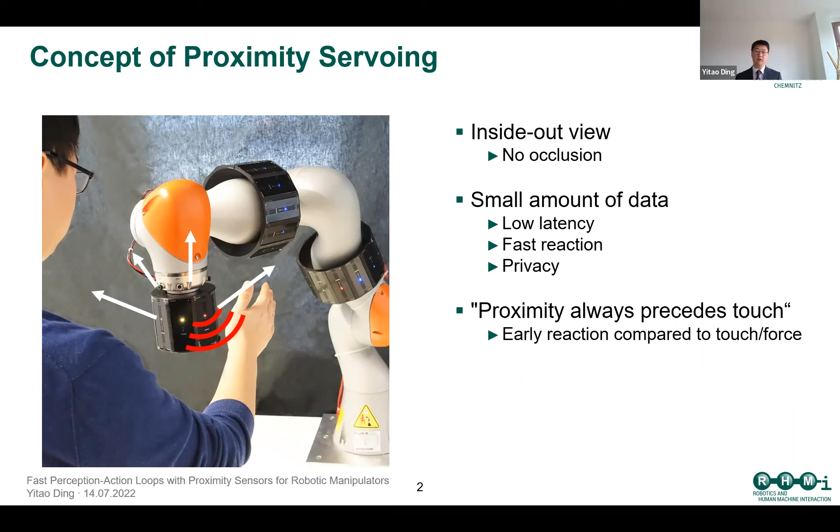I want to start with the concept of proximity perception. Proximity perception uses the inside-out view concept, and compared to external view cameras, they don't experience occlusion in the same way. In fact, anything that occludes the sensor is a relevant obstacle, and otherwise the sensor remains untriggered. With that, we can achieve very low latency and very fast update rates, and this is important for fast reactions of the robot.

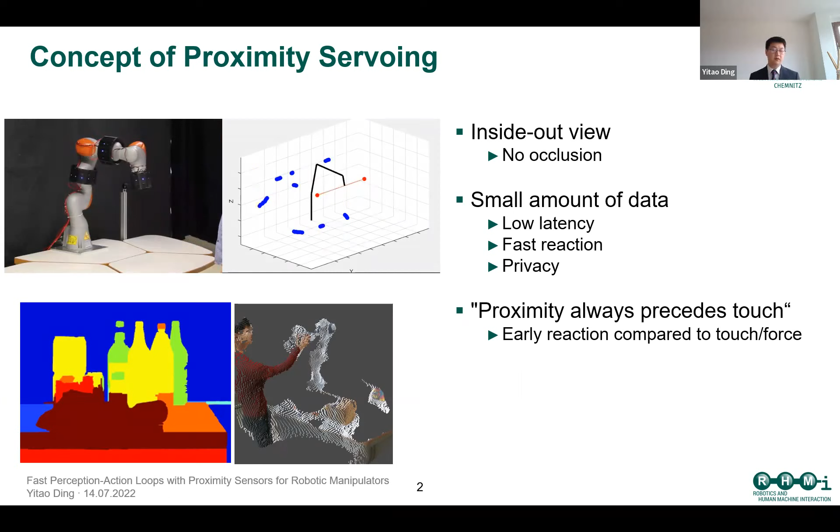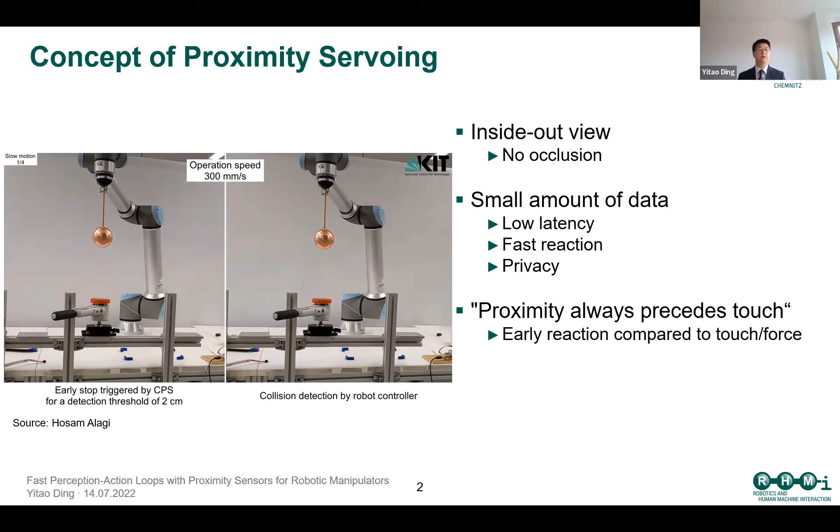Furthermore, we can preserve privacy. Another point is that proximity always precedes touch. We can react earlier before impacts occur. In this example, with even low, small detection distances, we can reduce impact forces very effectively. Or from another perspective, the robot can move much faster while still maintaining the safety of force limits for safe human-robot interaction. And with that said, my research in proximity perception is related to safety in human-robot collaboration.

On the left, you see a typical industrial setup where the environment of the workspace of the robot is very well defined and well known for repetitive and pre-programmed motions. And therefore, the workspace is fenced to avoid disturbances by humans and protect them. On the right side, in contrast, we see an application called collaborative robots. Cobots are designed specifically for human-robot interaction, where the robots and the humans share the same workspace and interact with each other.

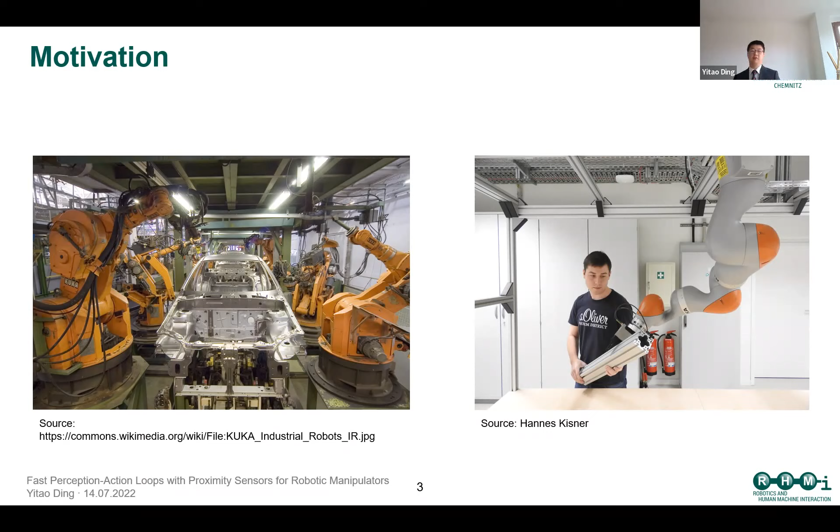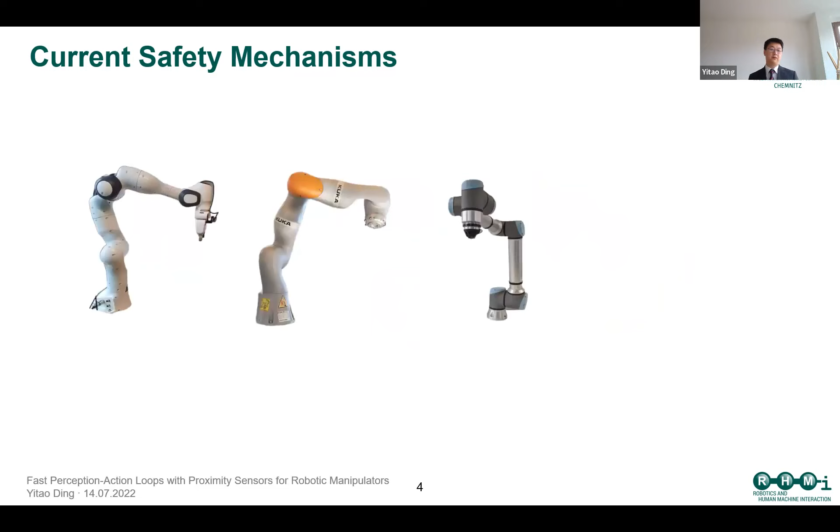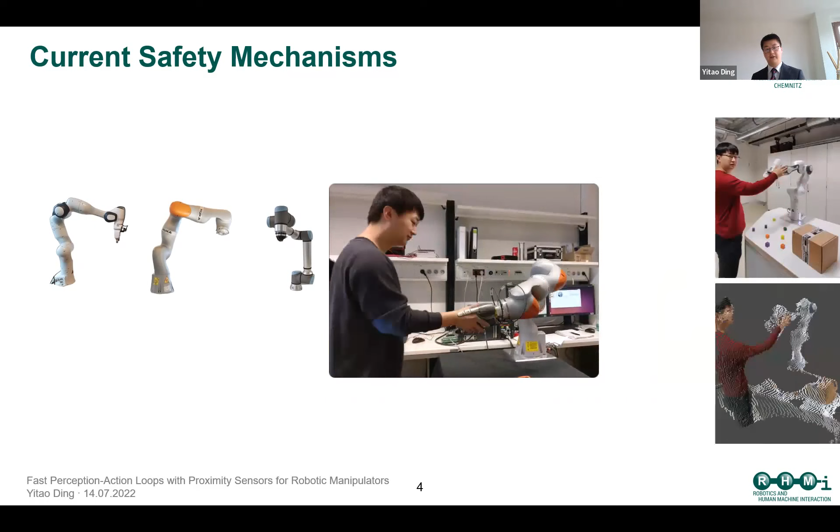Now, cobots have some safety features, and from a mechanical standpoint, they're typically very lightweight. They have soft paddings and rounded corners. They also use some kind of sensor systems to provide further safety. For example, they are compliant and soft through the use of force and tactile sensing, and they also use external viewing cameras to detect intrusion into the workspace. And often the reaction is a simple issuing of a safety stop or the reduction of velocity.

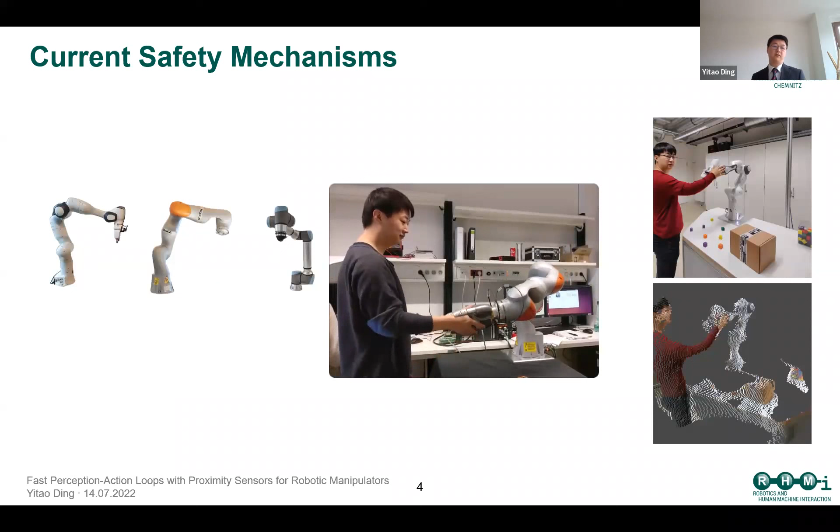Now, the problem with these two sensing systems is that there's a perception gap in the close proximity of the robot, where the vision can be blocked by an obstacle and the tactile sensors or force sensors still remain untriggered. Furthermore, the control schemes still rely on today's industrial robot controllers, which are simple motion automata that strictly follow a predefined path. Predefined motions are very unsuitable for cobots to move in a cluttered environment, where everything is continuously changing, without risking the safety of humans or damaging the robot itself.

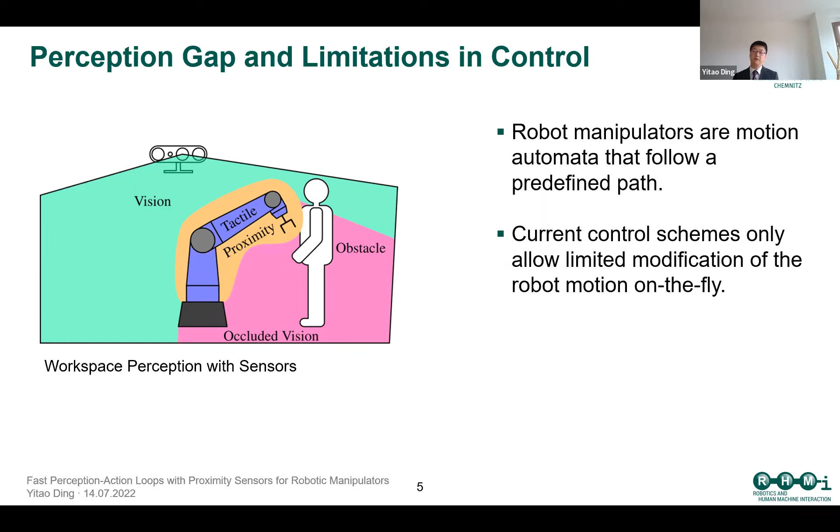And we can solve this problem using on-robot proximity sensors to bridge the perception gap, and can use this information to go beyond simple stopping or reduction of velocity motions, and use more sophisticated motion generators to create reactive motions around obstacles or use them to attenuate impacts.

So today's talk will cover the main 3 contributions of my work, which cover the complete perception action loop. First, I will give a short introduction and brief overview of my self-developed sensor system. Then we'll jump over to the motion generation part for obstacle avoidance. And then we'll discuss how we can proactively reduce impact forces.

The system that I have developed looks like this. And fun fact, the main intention of my work was originally to focus on the motion generation part. However, there were no systems available, so I had to develop a system by myself that is able to detect humans robustly and also provide sufficient information for the control algorithms.

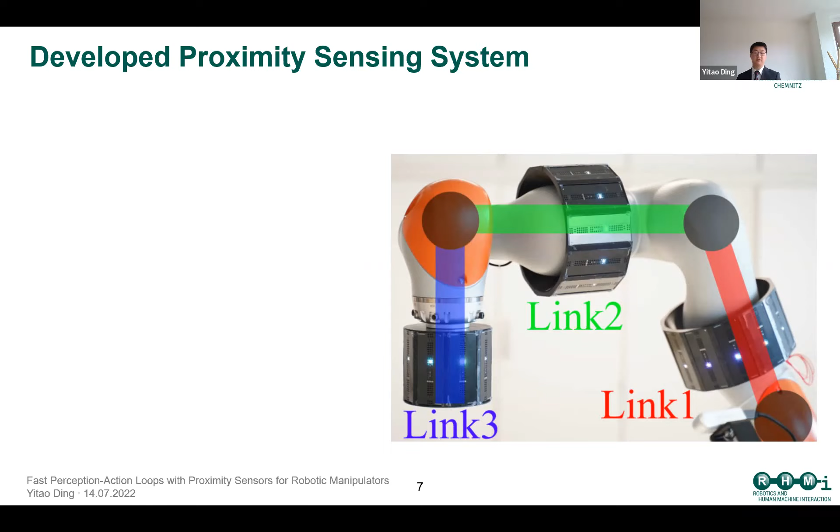The system consists of 3 sensing cuffs. They are attached to the 3 main links of the robot, and each of these cuffs house different numbers of proximity sensing modules, which are the heart of the system. Each sensing module uses a laser time of flight sensor for far range detection, and also uses a self-developed capacitive proximity sensor for wide area coverage of the robot. This is important in case something slips through the view of the laser time of flight sensor, since the capacitive sensor is still able to detect them.

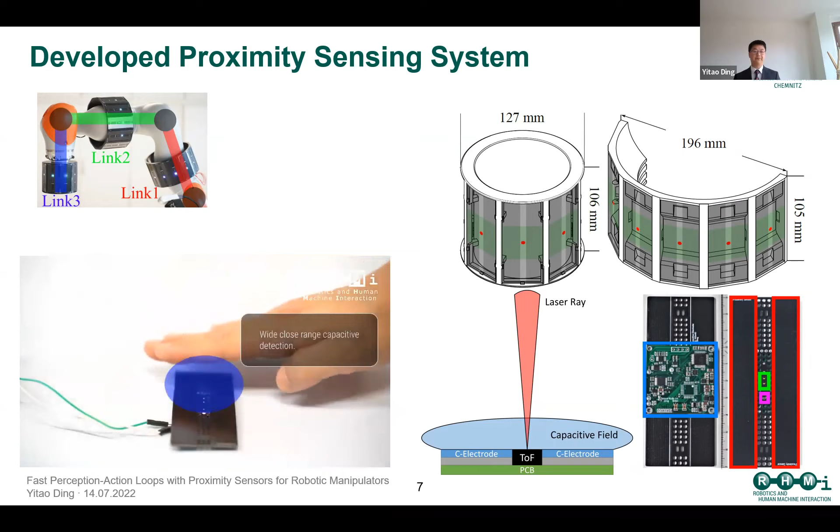The complete system looks like this. We have some kind of motion input, which can come from capture devices or some kind of higher level path planners. The desired motion goes into the robot control algorithm, which considers the sensor measurements from our proximity sensors and then generates a new joint motion, which is sent to the robot controller, where the motion is executed by the robot.

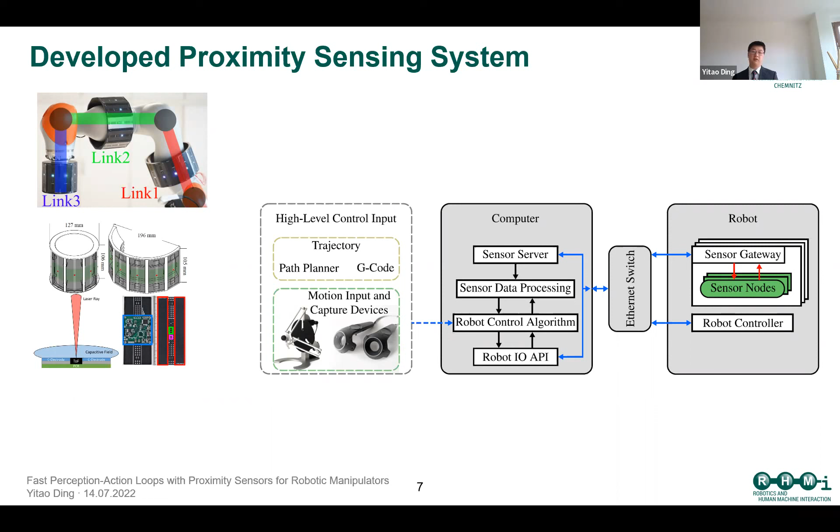I want to focus on the two sensing principles that I'm using. In the top left, you see the time of flight sensor that I'm using, which can be bought. And in the top right, the self-developed capacitive proximity sensor. In this table on the left side, you see some sensing properties in which at least one of the sensors should be good at. I won't discuss all the properties because of time.

Let's start with the range. The time of flight sensor has very good range, up to 1 meter in this case, and very high accuracy due to absolute distance readings. Capacitive sensors, on the other hand, have very low sensing ranges. And also the distance readings are not very accurate because they are material dependent, also depend on the target sizes.

An interesting point is that time of flight sensors don't have that much update rate, in the range of 30 Hertz to 100 Hertz. But this is not very important because of the large sensing range, where we can react very early to obstacles. With the capacitive sensor, on the other hand, we need very high update rates because we have to react very fast due to the short sensing distance.

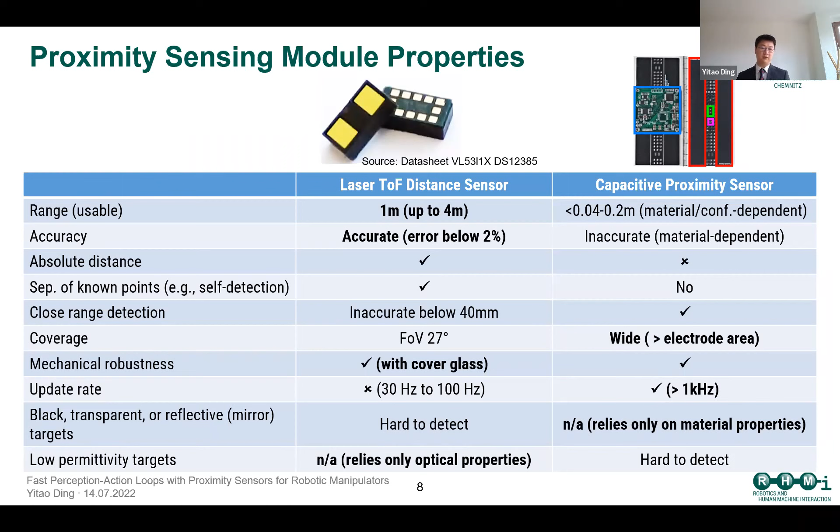I also want to highlight the sensing principle I have developed myself. Usually, the capacitive sensors use one of these two sensing principles shown here. And the problem is with the grounded state of the target. If the target is grounded or ungrounded, the sensor readings will be different.

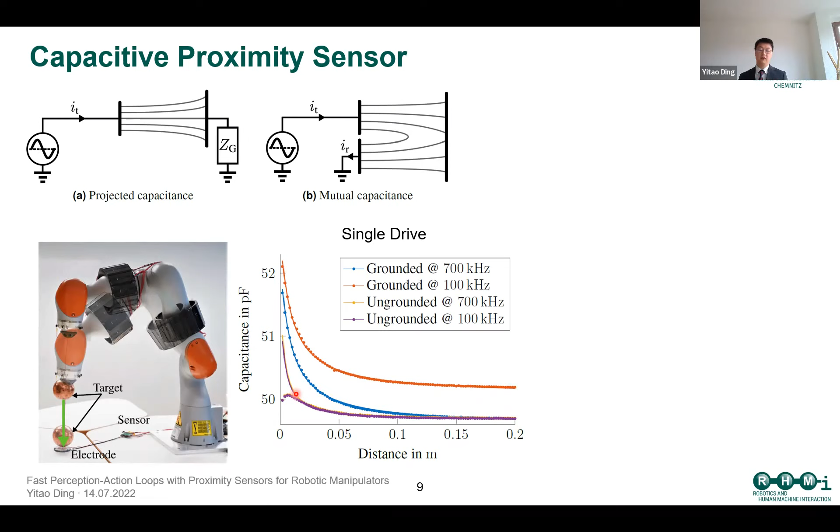This can be seen here in the plot. For the grounded target, we have the same sensor readings at 20 centimeters as for an ungrounded target at 1 centimeter. So if we don't know the grounded state of the target, these sensor readings are very unreliable and actually not very useful to use.

I solved this problem through a self-developed sensing principle. This is very similar to the mutual capacitance method. The only difference is that the second electrode, the grounding electrode, is now driven differentially, which means the signals will cancel each other out in the object itself, and the voltage inside the object will always be 0. Therefore, we can virtually ground the object. It is always grounded.

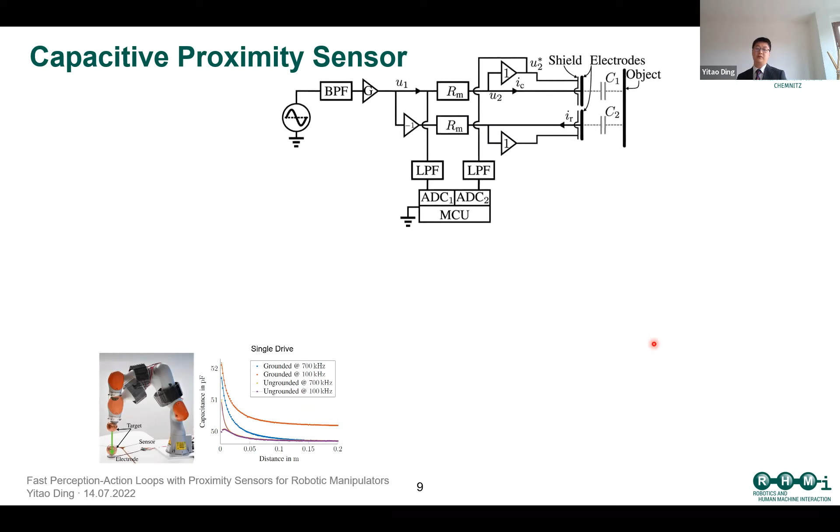As we can see in the sensor readings with the differential signal, no matter if it's grounded or ungrounded, the sensor readings are very, very similar. With that, we can achieve reliable proximity measurements, no matter how the target is grounded.

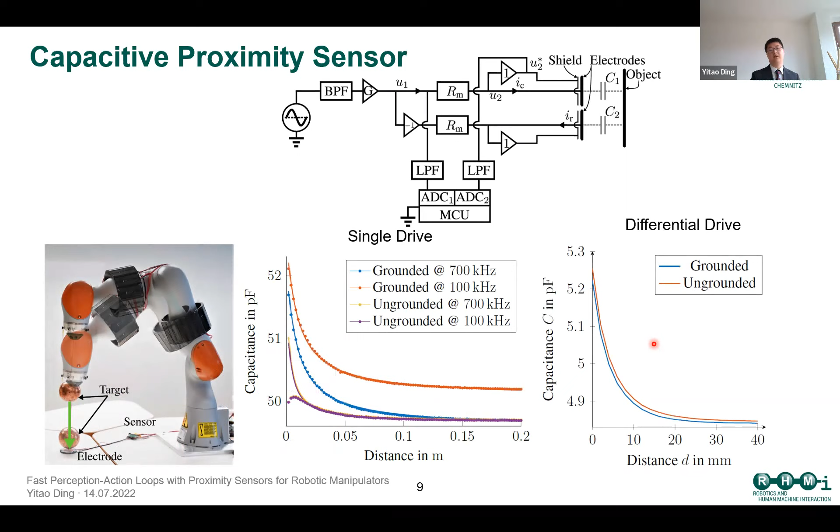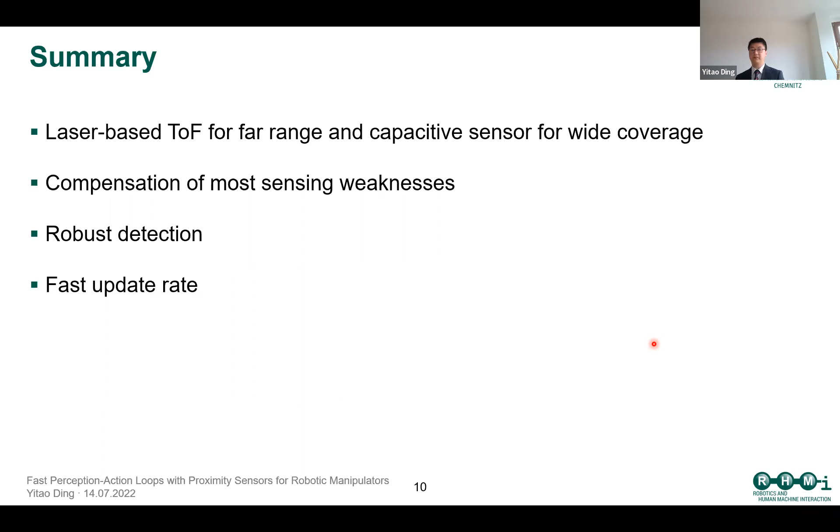To summarize everything, I've developed a laser-based time of flight sensor module that uses laser-based time of flight sensing for far range and capacitive sensing for wide area coverage. The sensor principles compensate each other for their sensing weaknesses, and we have robust detection of humans through capacitive sensing. We have fast update rates, and now I have finished giving a short overview of my on-robot proximity sensors.

And we jump over to the next part about reactive motion generation for obstacle avoidance. If you couldn't follow before, now you have your chance to step into the game again.

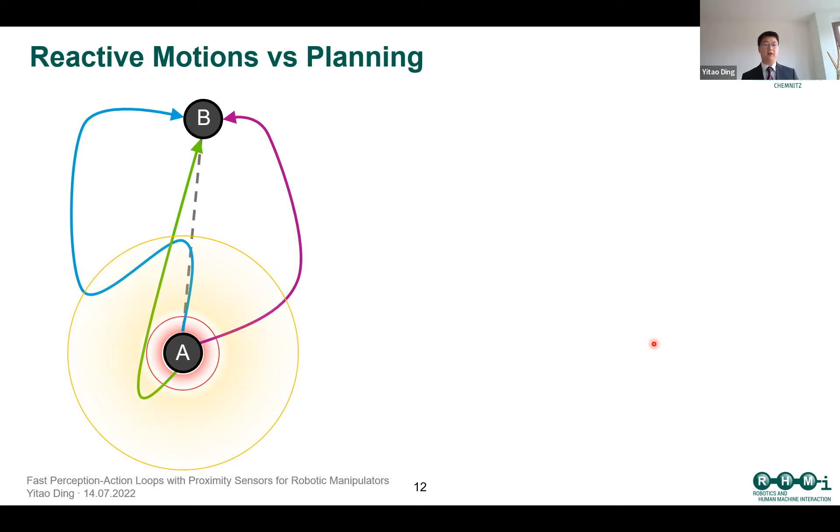What about if we only have limited perception, or even worse, we can only look 1 step ahead? This resembles reactive motions. We try to optimize for 1 step ahead and find a motion that is most suitable. The idea is that global planning algorithms provide very good, optimal results, but require a lot of information and computation time.

This is not very suitable if, for example, someone jumps to the robot and you need to change the robot's motion and be very reactive. We can use reactive motions, which don't require a lot of sensing information and also have very low computation times to generate.

With that, we can keep the robot in a safe state while the global planning process is still running, and we buy some time for the global planning algorithms.

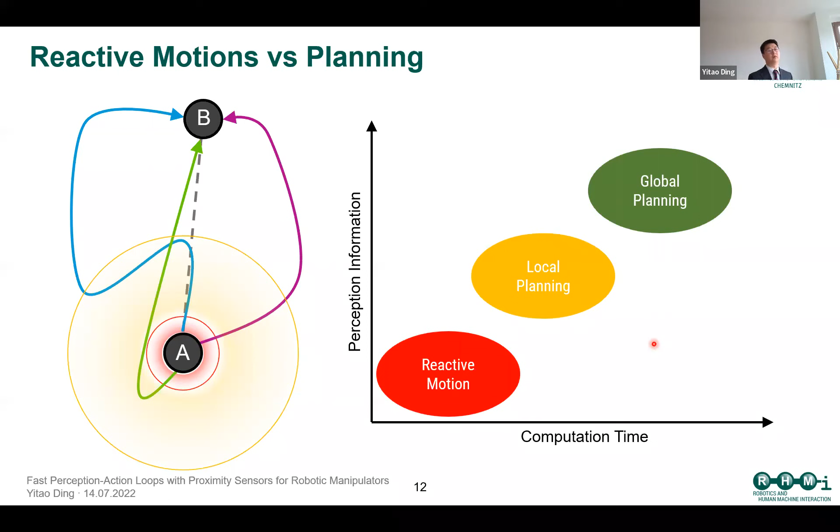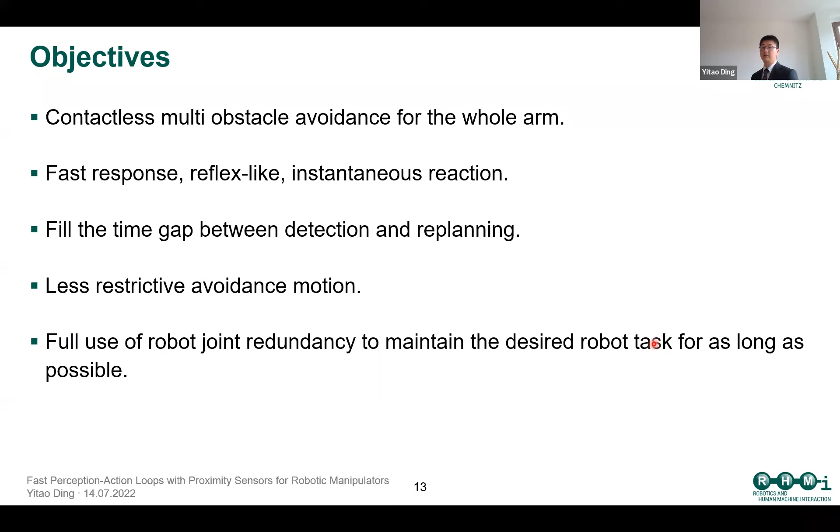The objectives of the reactive motions in this case are to have contactless, multiple obstacle avoidance for the complete arm, be very fast, fill the time gap between detection and replanning, be less restrictive than commonly available motion generators, and fully use the robot's redundancy to maintain the desired motion or robot task as long as possible.

Before we start with the avoidance motion generation, we first have to know how we can control the robot. Usually the avoidance motion is given as a vector in the task space or Cartesian space, and we need to find a mapping function that maps our task space motion to the joint space motion, because the manipulator is usually controlled by the joints.

The mapping function which does that is the Jacobian. The Jacobian is the derivative of the position and orientation of a certain point on the manipulator with respect to joint angles. With that, we can calculate the task space motion for a given joint motion.

Usually we require the inverse of that. We command a task space motion and need the joint space motion to control the robot. So therefore, we can invert the Jacobian to get that.

Now, very often the Jacobian is not invertible. For example, if we have redundancy, more joints than necessary, or if we don't have sufficient joints to execute the task. Now we can use the following pseudo-inverse solution, and without further proof, this pseudo-inverse minimizes the quadratic error of our joint task space motion.

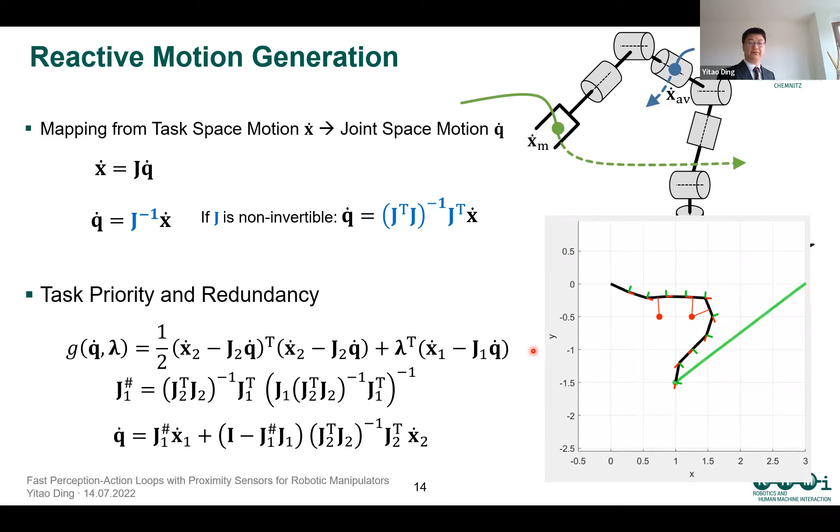Sometimes the avoidance motion can be also the main task. However, repulsive motions are very restricted because you ask the robot to move in the opposite direction. This can cause problems in front of obstacles, because the robot can freeze before them. This is because the repulsive motion and the attraction motion to the target position cancel each other out, so the robot freezes in front.

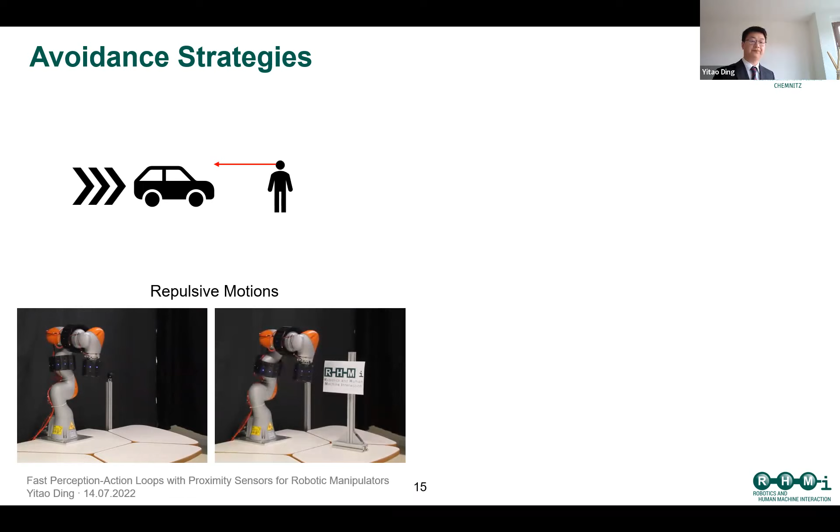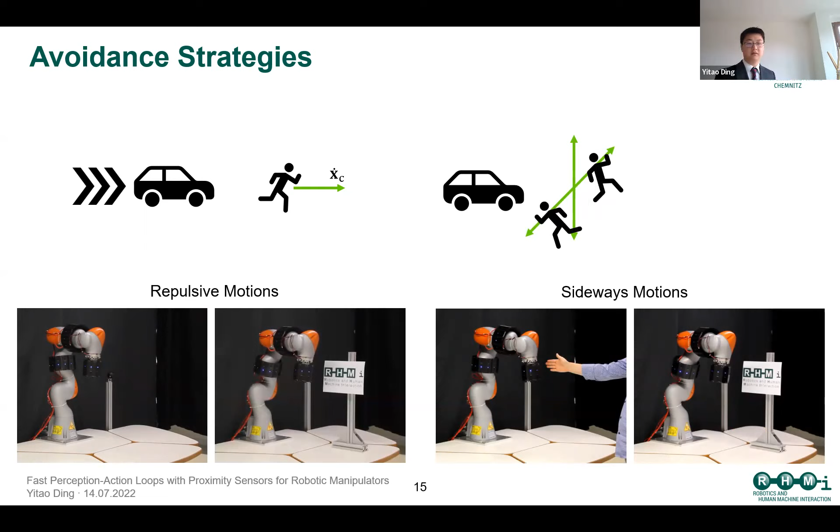Now, in order to solve that, we can be less restrictive. What if you only ask the robot, or define a plane, and let the robot decide on its own which direction to take? This is less restrictive, and the robot is able to move around obstacles.

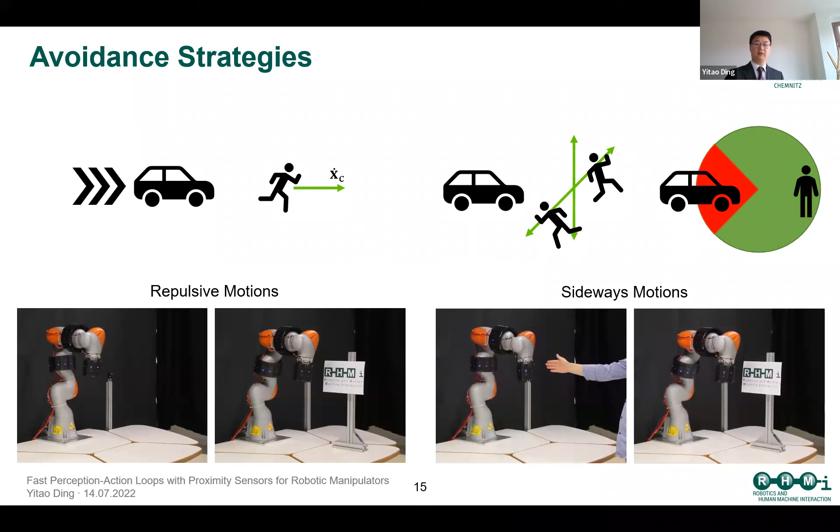We can be even less restrictive by defining a space in which the robot is allowed to find an optimal solution, constraining this space only towards the obstacle where the robot is not allowed to move. This is the second strategy we will discuss. But first, the first strategy: sideways motion.

On the top left you see the distance towards the obstacle. If an object is in the first range, there's no interference to the robot's motion because it's far away. As it gets closer, you apply avoidance motion as a lower priority task so the robot's main task is not affected. If it gets even closer, we switch priority of the avoidance task with the main task, so the avoidance is executed 100% while the robot tries to perform its task. If that's still not sufficient, we apply repulsive motion, which guarantees contact-freeness of the robot.

The way we choose our avoidance vector is through sampling. An orthogonal plane is defined in the direction of the obstacle, and we sample different positions or vectors, scoring each, then choose the avoidance vector with the best score.

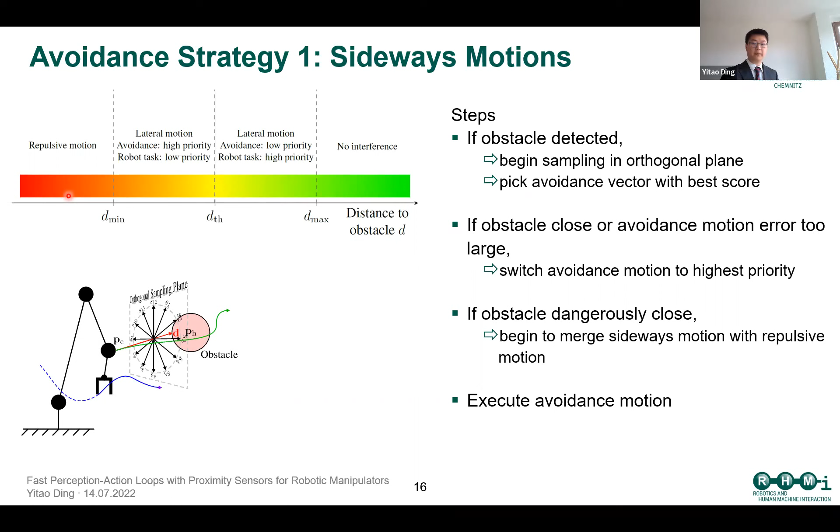The distance towards obstacles is also very important, so if one of these scores is zero, the complete total score will be zero. The other scores are not as important, so we just add them.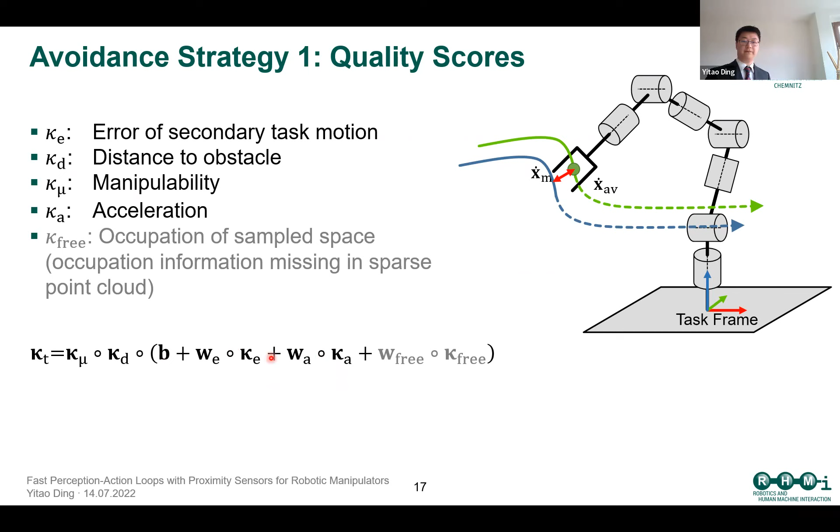For the second strategy, I tried to summarize everything into one general framework using constraint-based quadratic optimization. First we have our quadratic cost function, where the first term describes the error of our main task. Then we have the velocity term, since we want to reduce joint velocities to avoid singularities, and a term for the forces required for the motion. The quadratic optimization tool will try to minimize this cost function.

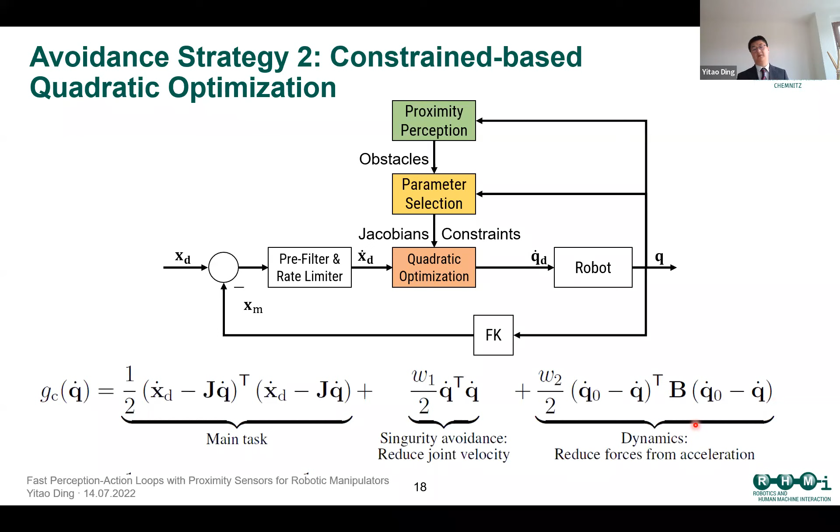However, there's still no avoidance strategy implemented here - that's done through constraints. We can calculate, for each point closest to the obstacle on the manipulator, the motion towards the obstacle, and use a constraint to limit this motion. The constraint is defined as in the following graph: if the obstacle is far away, there's no interference or constraint.

If the obstacle is far away, there's no interference. As the obstacle comes closer, the speed allowed towards it is reduced linearly. Beyond a certain threshold, this allowed speed becomes negative, meaning the motion of the manipulator at that point must have some components in the opposite direction. If there are further obstacles, we can add them up or summarize them as a vector in constraints.

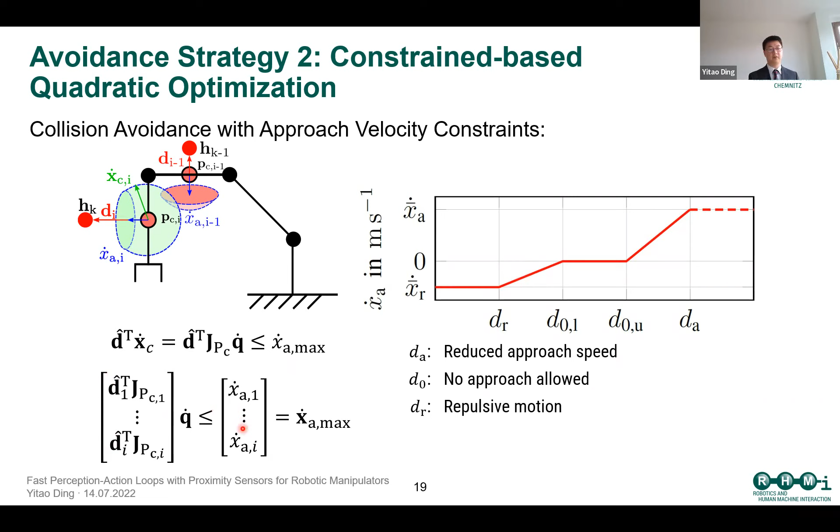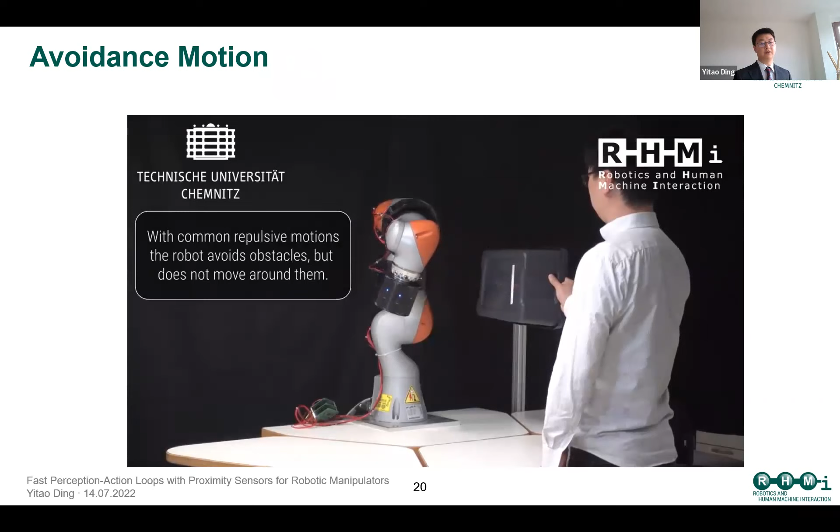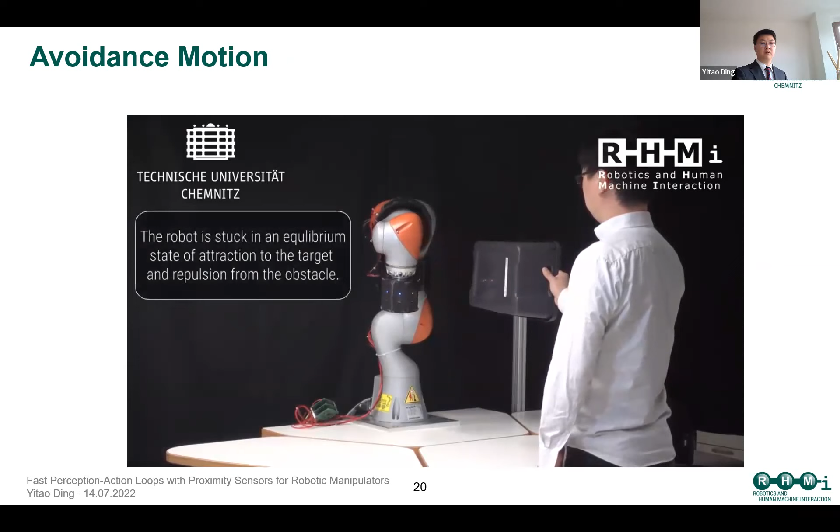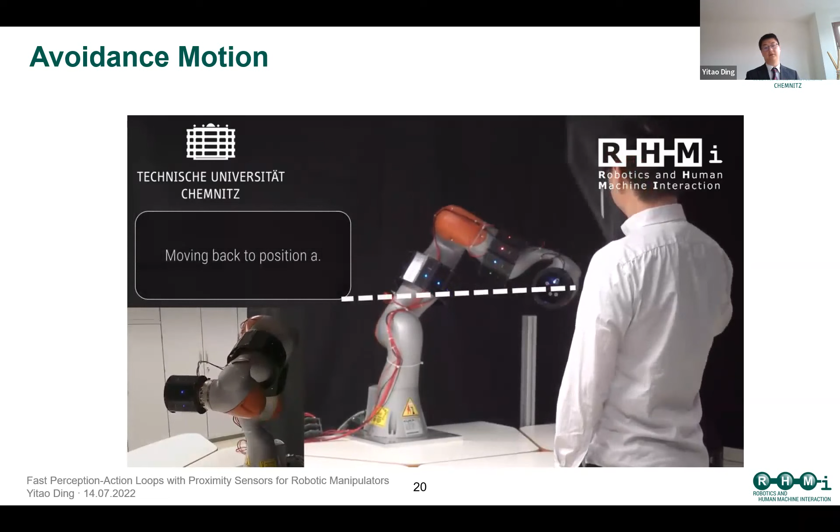Here's the result. We see the traditional repulsive motion where the robot gets stuck in front of an obstacle - now we can see it's stuck. Now we can see the robot is able to move around the obstacle, and if the obstacle disturbs one of the lower links, the robot tries to maintain its main task.

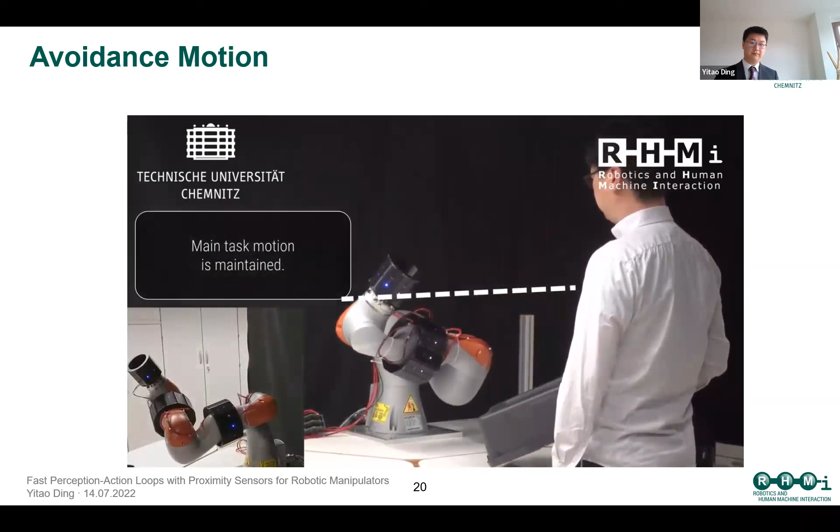Now I have discussed reactive motion generation. We jump over to the next part: proactive impact attenuation. There are situations where collisions cannot be avoided anymore - for example, if someone jumps very quickly at the robot and the required motion for collision avoidance cannot be performed by the robot itself because of joint limitations. There will be impact, and usually the impact forces are reduced through the compliant behavior of the robot with impedance controllers.

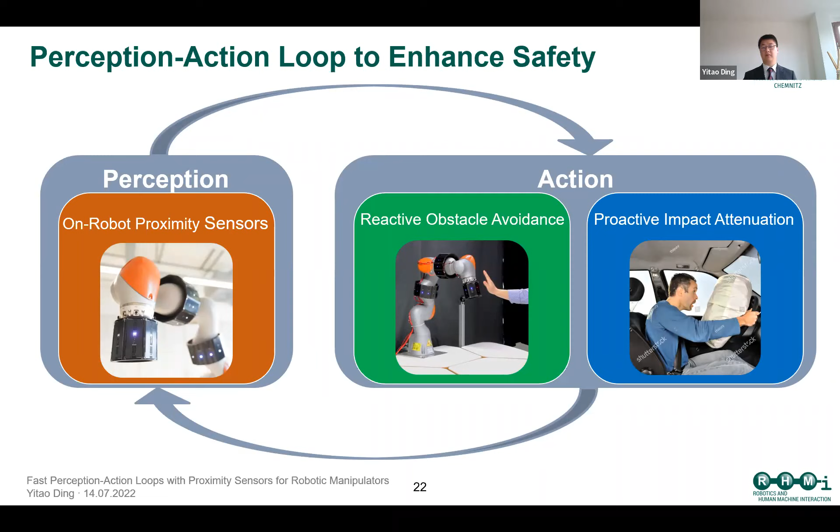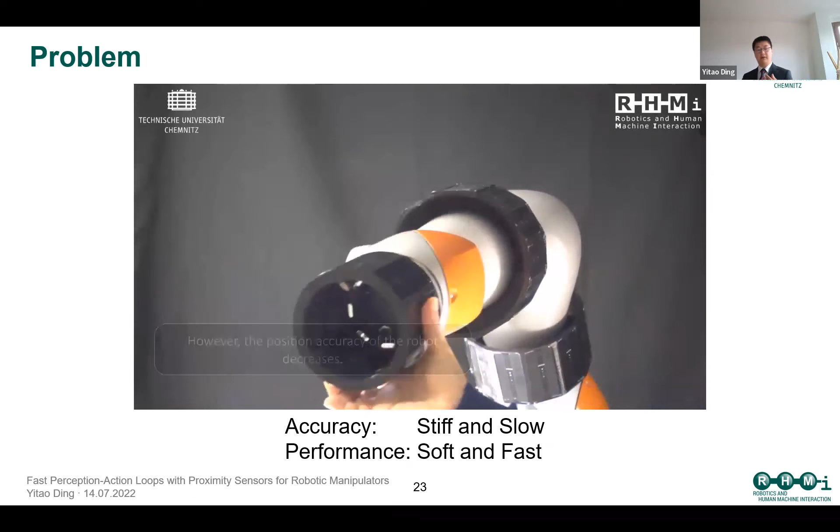The problem with impedance controllers is that you cannot achieve accuracy and performance at the same time. If you're very stiff, you have to move slow because you have to reduce impact forces. And if you want to move very fast, you have to be soft. Therefore you can't have accuracy and performance simultaneously.

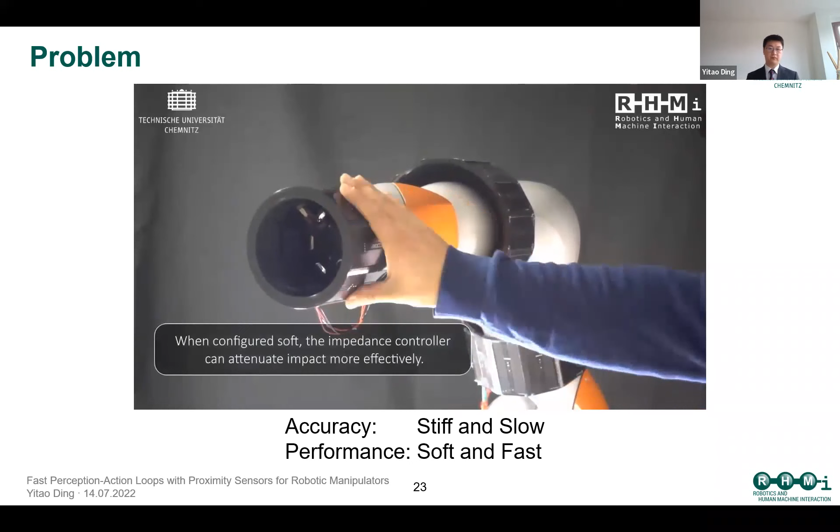The objectives are to remove the control paradigm restrictions of traditional impedance controllers. We want to increase safety, accuracy and performance just as required. We can use the proximity information to modify the stiffness of the robot just as required. For example, if the robot is in regular operation, then the robot can be very stiff and very accurate.

And if something gets very close, the stiffness can be reduced just as required. We can also reconfigure the robot before the impact, just so that the robot joints can align towards the impact direction. And this increases the effectiveness of the joints.

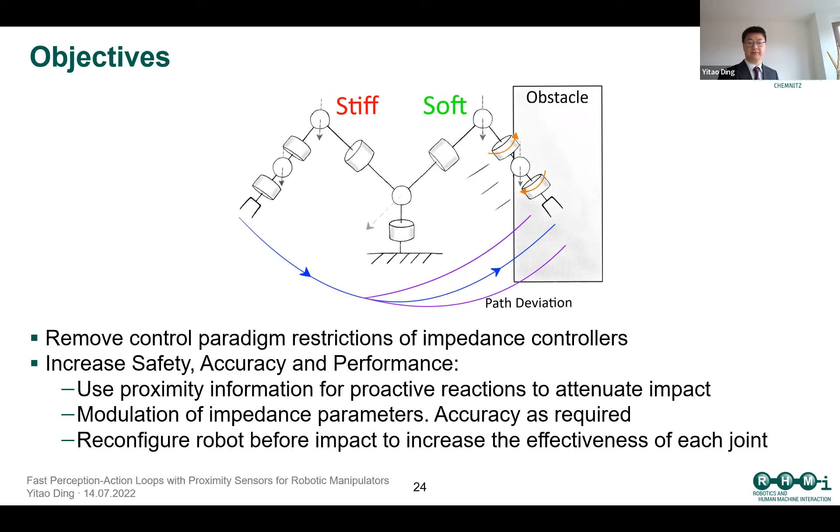The impedance modulation itself is very simple. The closer an obstacle gets, the lower the stiffness of the joints. And this is controlled through the following diagram, a controller. We have this because we want to have different rates for stiffness increase and decrease. For decrease, we want to be very fast, and for stiffness increase, we want to be more slow. And there's also an energy tank for stability.

The problem is that if you push on the robot or deviate the robot, it's like a spring system where you compress a spring. And if you modulate the spring stiffness suddenly to a higher stiffness, then at the same compression you suddenly have more energy, or potential energy, in your system. And if you have more potential energy in your system, suddenly that means the system can become unstable.

This energy tank is used to provide the energy for stiffness increase, and if the energy tank is empty, the increase is not allowed anymore. So therefore, we allow some kind of unstable or dynamic behavior until the tank is empty, and therefore we can still remain stable.

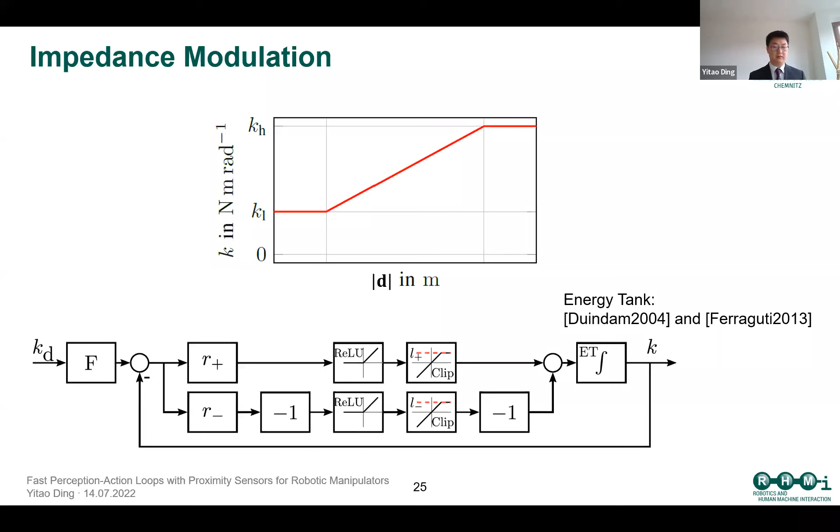Furthermore, we can calculate a manipulability score, how well the robot is able to move towards the impact direction at the impact point. We can also calculate the effective inertia towards this impact direction at the impact point. And then we can use quadratic optimization again to calculate a joint motion that allows us to decrease effective inertia or increase manipulability.

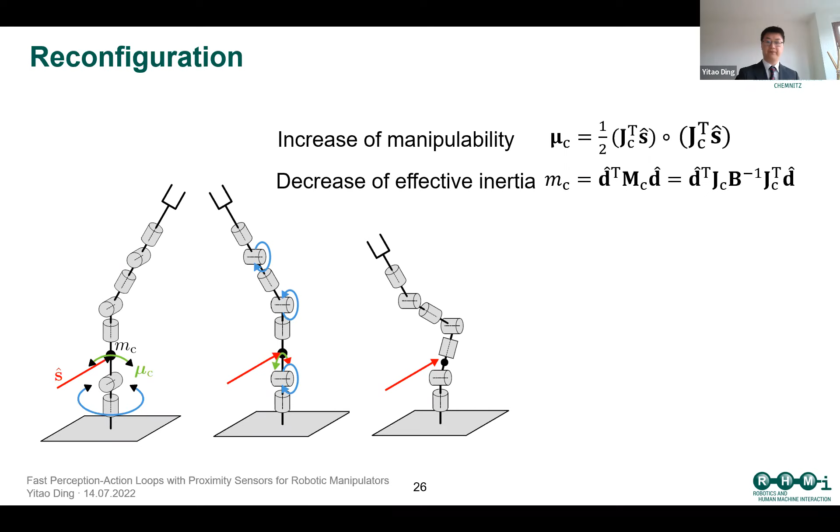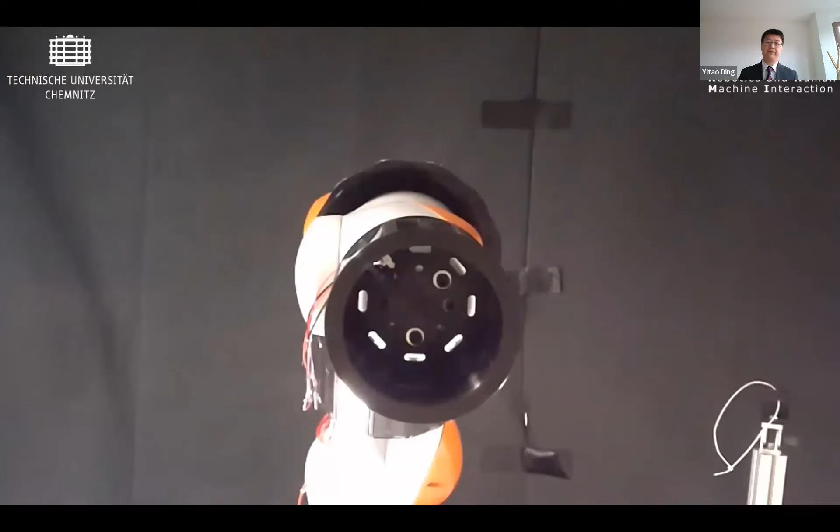And the result looks like this. Without any proximity information, the robot is very stiff and it's not able to reduce or dampen the impact.

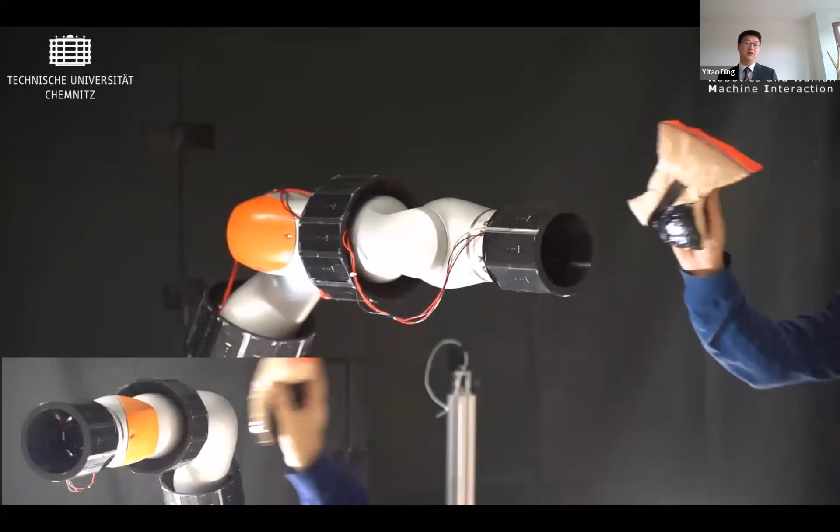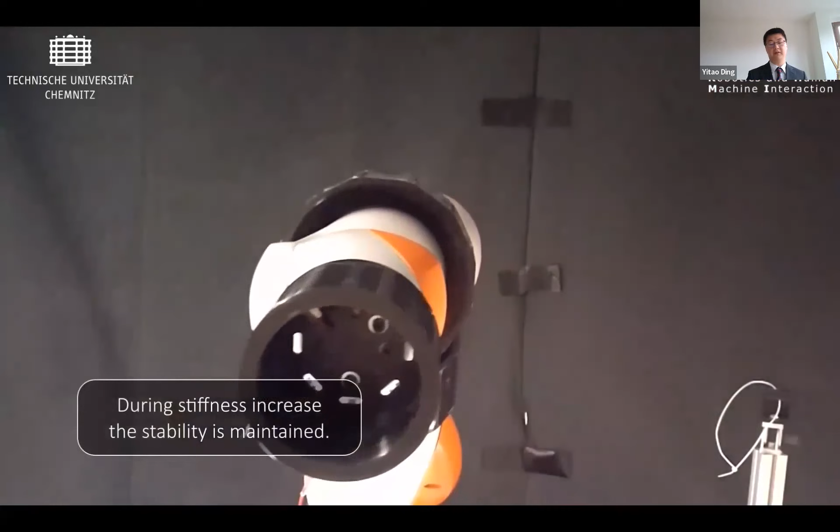Now we can react very fast and change the robot stiffness just as required. And also the robot moves its joints towards the impact direction so that more joints can participate in attenuating the impact, or damping the impact.

To conclude everything, I have shown an effective last safety layer when collisions cannot be avoided anymore. We are very fast, and we can easily integrate this into existing systems just by adding proximity detection capabilities. We overcome the accuracy and speed limitations of pure impedance controllers, and this should also work in combination with collision avoidance as a last safety net.

However, we have to take care with reconfiguration motions, because during contact the human is often very close to the robot, and we have to limit the range of motions for the reconfiguration to avoid injuries.

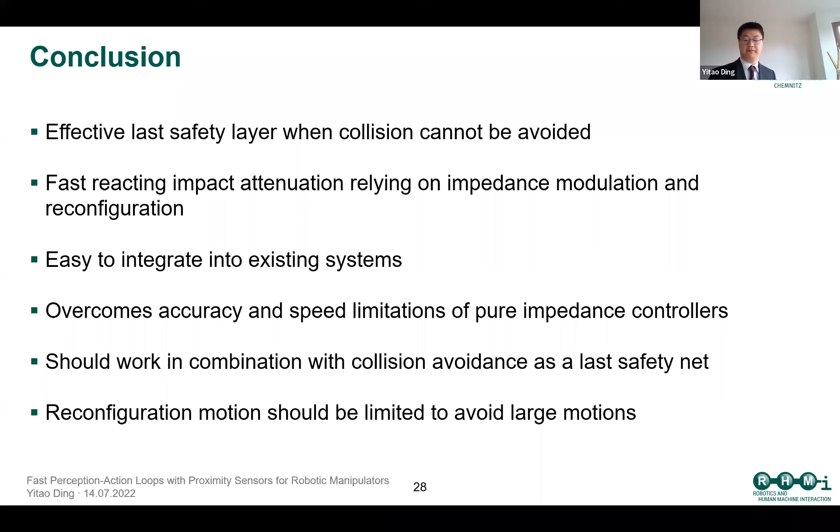To recap today's talk: in the perception domain, I've shown a self-developed sensing system based on two sensing principles. We can robustly detect humans or grounded and ungrounded targets, and we have sufficient range, and we are very fast. For the reactive obstacle avoidance part, I've proposed two avoidance algorithms which include whole body and multi-obstacles. We also fully use the robot redundancy, and I've shown a formulation of a general framework for reactive obstacle avoidance.

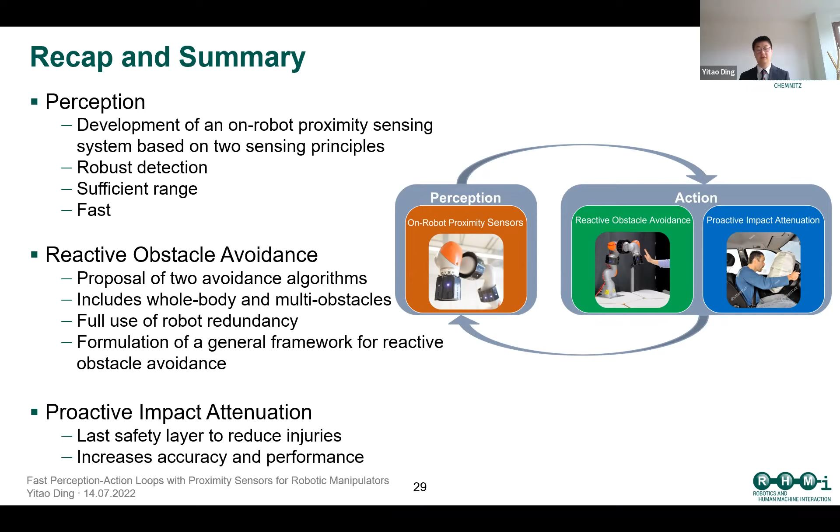And in the proactive impact attenuation part, as I said before, I've provided a last safety layer to reduce injuries, and we can also increase the accuracy and performance at the same time, or just as required.

What's next? In the sensor system domain, we can investigate more into the shapes and sizes of capacitive electrodes. We can investigate methods and processes to integrate these into existing systems, and we can also perform sensor fusion with vision and tactile information. I've also done some work in material detection with capacitive sensors.

In reactive motion, we can integrate replanning or path planning. And aside from safety, we have also many more applications. For example, manipulation and grasping. We can have it as assistance systems for remote control, medical robots, and we can also perform exploration.